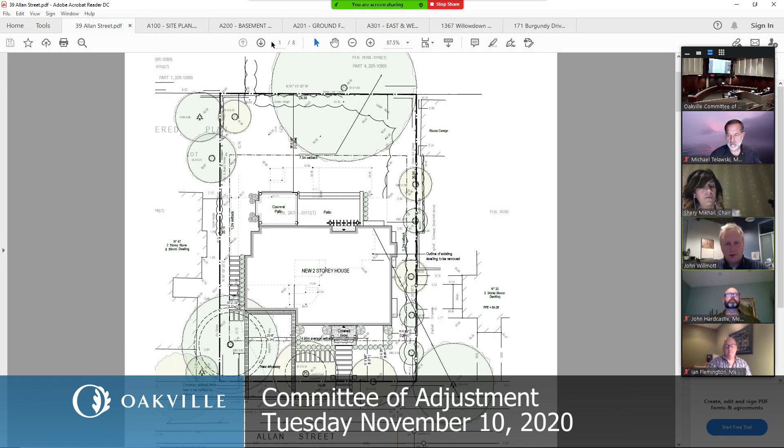Since this application has been supported, I don't need to go through it unless the committee would like me to answer questions. I just want to point out that we designed this in consultation with town staff, planning staff, and heritage planning. The application will go through a heritage review and approval after committee adjustment. We submitted earlier today, after my client canvassed the neighbors, one letter of support at least, and we're not aware of any objections to the proposal. So with that, happy to answer any questions.

Okay, very well. Just because of our new system during COVID, we need to give some time for anyone interested in speaking to the application to call in. So if you want to take a couple of minutes to quickly run through the application while we do that for the benefit of the public, I think that would be best. I know it's a new proposed dwelling, and the variance you're requesting is a lot coverage variance, but I'll leave it in your hands to go through it, and that will give time for the public to respond.

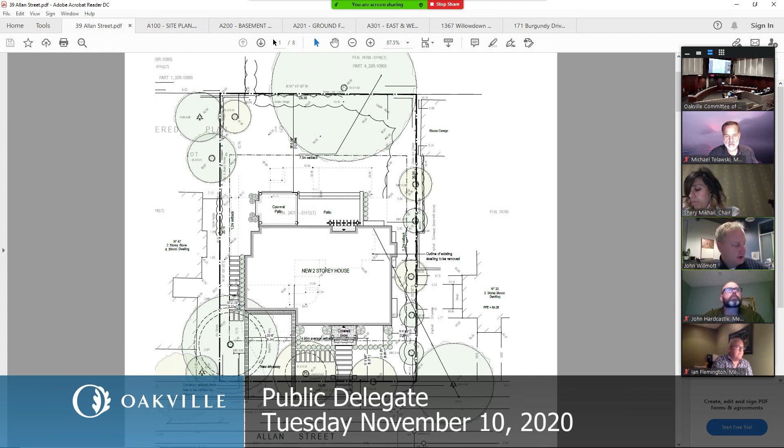Okay, very well, thank you. Ms. McCrae, has anyone called with interest in this application in the meantime? Not at this time. Very well. Okay, so Mr. Willmott, you've seen the recommended conditions by town staff, and I'm assuming you're satisfied with them.

Yes. And if you are, then we're ready to move this into committee and have a motion. Okay, thank you. Go ahead, Mr. Flemington. Thank you, Madam Chair.

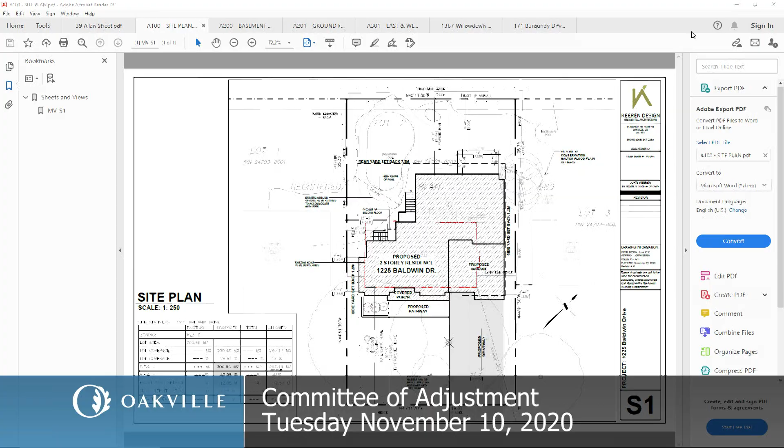I also want to mention that my staff did canvass the immediate neighbors and was able to connect with 3 of them, and to explain the application, there were no objections noted. Just wanted to share that.

Okay, so variance number one, I've just kind of clarified here. This is the area that we're talking about, and we're now within compliance. It's allowed to project 1.5 meters beyond that rear yard setback. So we're just clarifying that. Before, that deck was larger, so that's variance one, no longer required. Go to the next slide now.

Page 2, yeah. So we're jumping ahead here to variance 3, which has to do with the front yard setback reduction. We've just bubbled the area at the front of the house to show that not the entirety of the dwelling is beyond the front yard setback limit. It's just kind of 2 areas. So that's number one. And number two, if you look at the back, sorry, still back to that previous slide, please.

Yeah, so just the other box there, pointing towards the Conservation Halton setback line, I just wanted to explain that that's really the reason why we're being pushed forward, because that setback line is, as you can see, quite far towards the front. So that's really the main driver behind the request for that variance. Next slide.

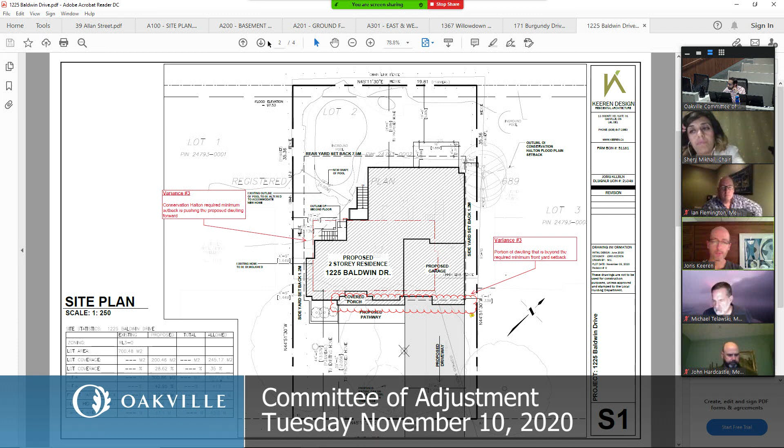So the second variance, which has to do with the RFA overage, I just wanted to let the members know where that's coming from. So on the main floor, we have a servery that was added. That's about 5 square meters, 4.6 square meters.

And then if we can go to the next slide, last one. On the second floor, we basically provided a laundry room, and then an ensuite for one of the bedrooms. So bedroom 2 got its own ensuite. So those three elements add up to the overage, which is about 14.7 square meters in total.

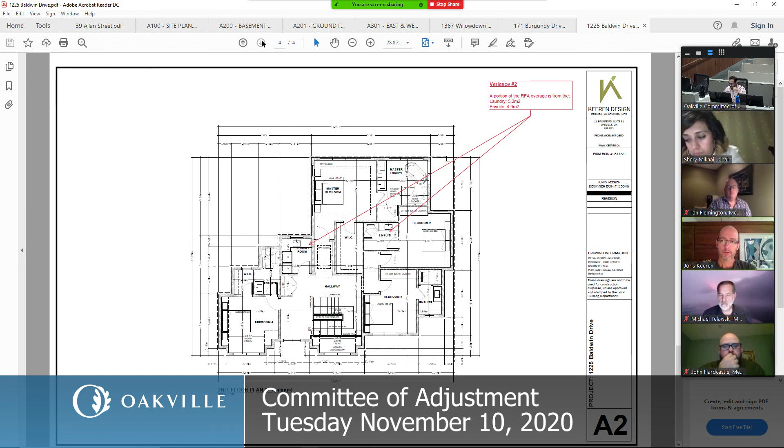So that concludes my presentation. I'll be happy to answer any questions if there are any. Very well, thank you. Are there any questions of Mr. Keeren at this time? I see none.

Ms. McRae, do we have anyone interested in speaking to this application that has called in so far? Not at this time. Okay, so gentlemen, Mr. Keeren, if you're satisfied, then we can move forward with a motion. Sure. Gentlemen, the application before us is amended, so we are now asking for a motion to consider variances only 2 and 3, since 1 has been struck out. Who would like to move a motion? Okay, Mr. Telawski, go ahead, sir.

Madam Chair, I'll be pleased to move the application as revised to remove variance number 1, be approved, finding that it meets the 4 tests of the Planning Act. I would note that there was no objection from the community to this application. I would make that approval conditional on development proceeding in general accordance with the revised drawings as presented to the committee at the meeting. I did not see a date on those drawings, and that a building permit issue within 2 years.

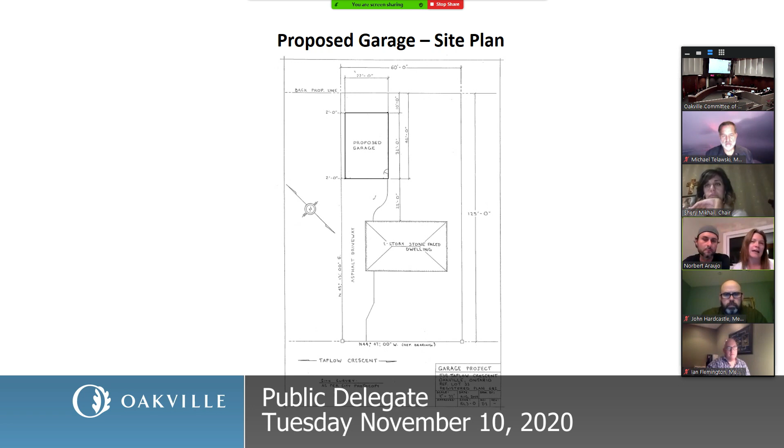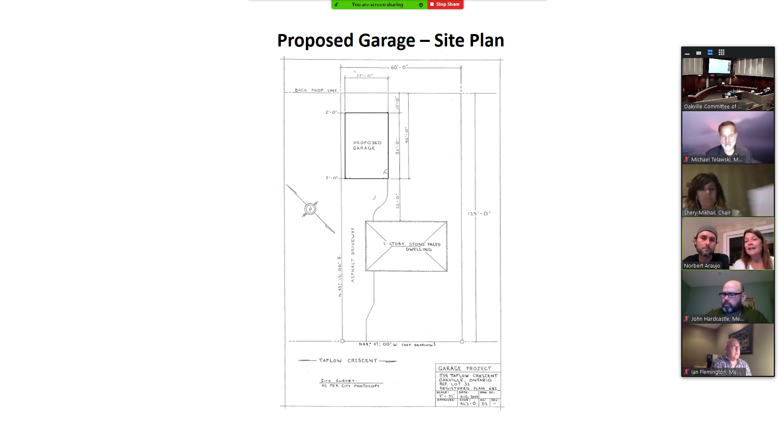Very well, are there any questions? Go ahead, Mr. Hardcastle. Thank you, Madam Chair, could I have the property owner confirm the size of the building? Yeah, I picked that up too, I was scrolling down on my screen to make sure that I heard it right. The size of the garage itself, like the proposed garage? Yes. 65 square meters. Okay, thank you.

That's not what we have, yeah. Perhaps I can direct a question towards staff, because I note that the two variances use two different numbers. In the first variance, the total private garage space is 59.5, whereas for the coverage, it's using 65.4. Perhaps staff can clarify the difference. Through you, Madam Chair, I'm looking through the drawings right now, and I don't see an indication on the floor plans as to the difference in the size. It doesn't appear that there's any separate area in the garage for areas such as storage that wouldn't be for the parking of vehicles as defined for a garage. So unfortunately, I'm not sure what the discrepancy is between the two figures.

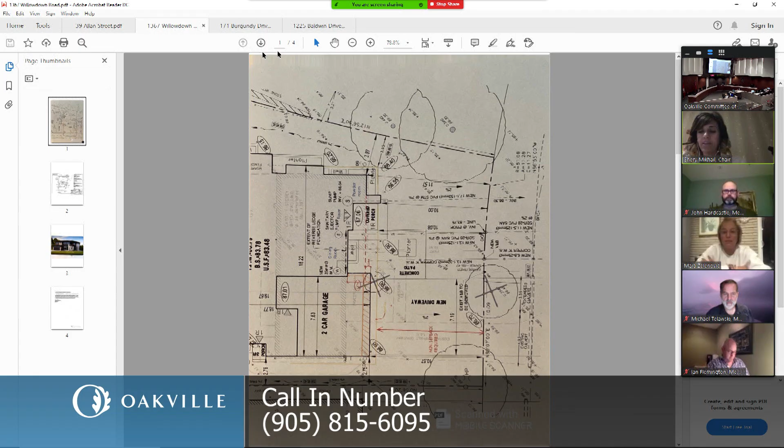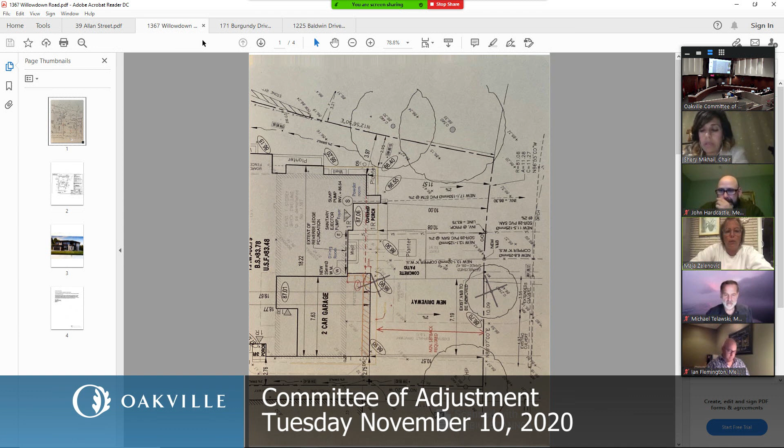I know this is a newly constructed home. Good evening, Madam Chair and the committee members. My name is Maya Zelenovic, and I represent my husband and myself for our home at 1367 Willowdown. We're requesting a garage length variance for our already constructed home under construction home to 2.17 meters from the approved building permit of 1.5 meters. So we're looking for a 0.67 meter exception.

We were previously at the committee for a larger square footage garage and overall RFA back in December of 2019. We were approved at that time, but we weren't aware that the garage didn't meet the requirements needed, and unfortunately through a series of unfortunate events, the garage ended up being built with the wrong survey.

As you can see in slide 1 here, this is where we stand today. We should have been back at the line to the inside of that garage there, where the yellow is marked off. We were always within our minimum setback, and we still are. Where the arrow ends with the minimum setback, that is an overhang of the roof above.

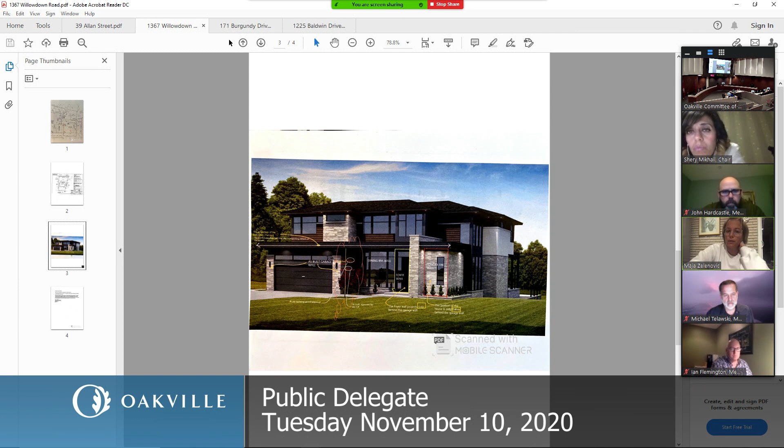If you go to slide number 3, you can see that the whole house is kind of on an even plane, and that represents what it looks like at 2.17 meters. So we're just asking for it to stay as it is there.

If you go to slide 2, you can see there that's the current survey. It's pretty much in line with our neighbor to the north, and we do have a wall that actually protrudes even further than the garage. That's like a parapet wall coming out as an architectural feature. We do understand that we were supported by the town on this, and if you need any further information.

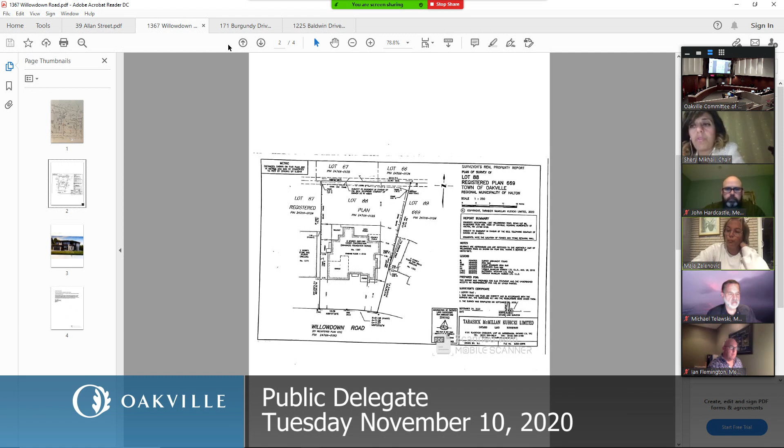Perfect, thank you, Ms. Zelenovich. Are there any questions? Go ahead, Mr. Hardcastle.

Thank you, Madam Chair. I'd just like the homeowner to confirm that the additional projection is actually a roof form and not interior space of the garage. No, it's a flat roof form that just represents an architectural feature. It'll have like an ACM panel on the front, just a feature. Right, but not interior space projection? No. Okay, thank you.

Thank you. Are there any further questions or items of clarification? Okay, I see none. Ms. Zelenovich, if you're satisfied with your presentation, and you're aware of the recommended conditions by town staff, we're ready to take the matter into committee.

Okay, who would like to go ahead, Mr. Telawski? Thank you, Madam Chair. When I was building my own house, I arrived one morning to find my contractor and surveyor having an argument in the hole while they were waiting to pour the foundation as to who had the footing in the right place. So I can appreciate that accidents do happen on grading sites. Having said that, having viewed the dwelling, which is essentially completed on the exterior at this point in time, I don't see that there will be an impact from this variance.

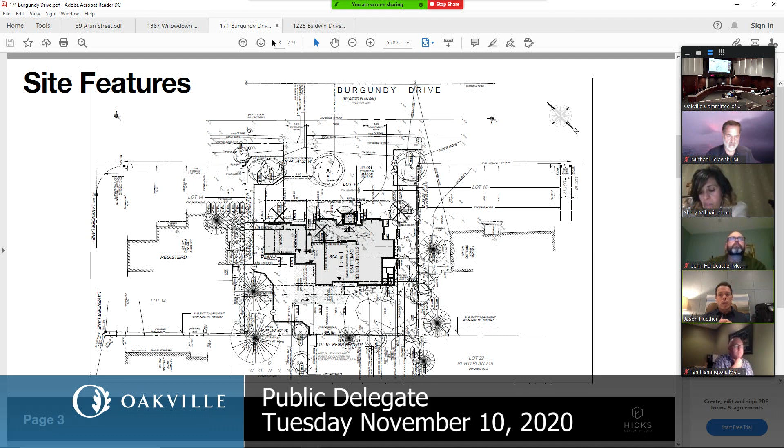I'll just deal with the variances quickly in the order that they were listed. So the rear yard setback, if we can go to page 4. The setback in this case is taken to that covered terrace porch column. The house itself, the main body of the house, meets or exceeds the bylaw requirement of 10.5 meters. The lot is again slightly less deep, so the covered porch, which is unenclosed and single story, projects off the back of the house, thus the requirement for the rear yard setback variance. So again, it's to a covered porch and not actually to the house itself.

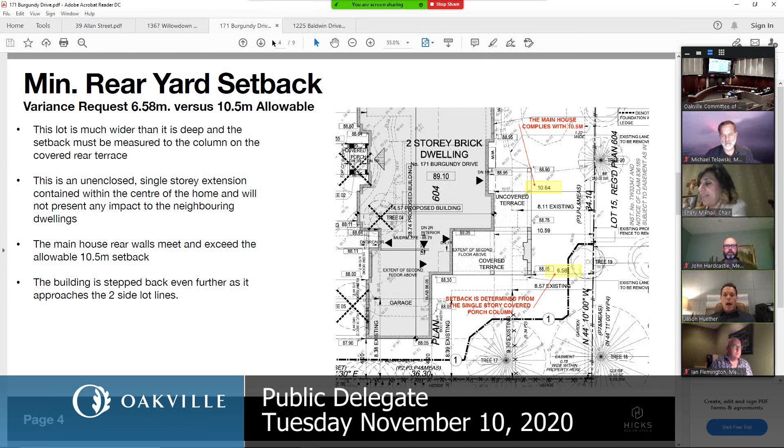The next variance is residential floor area. The variance is really program driven for this home. All steps have been taken to minimize impact of scale for the additional RFA to the neighboring dwellings and the neighborhood itself. The massing of the home has been broken into several distinctive features. The building faces have been stepped along the front facade as well as the roof lines. Particular attention was paid to the area above the garage and how that stepped down to the neighbor to the west. The house features substantial side yard setbacks. We meet front yards, we meet coverage, and it relates well to the current changing neighborhood context. For the most part, in this case, the additional RFA is centrally located in the main mass of the building. We've done all we can to reduce the impacts on the 2 wing walls.

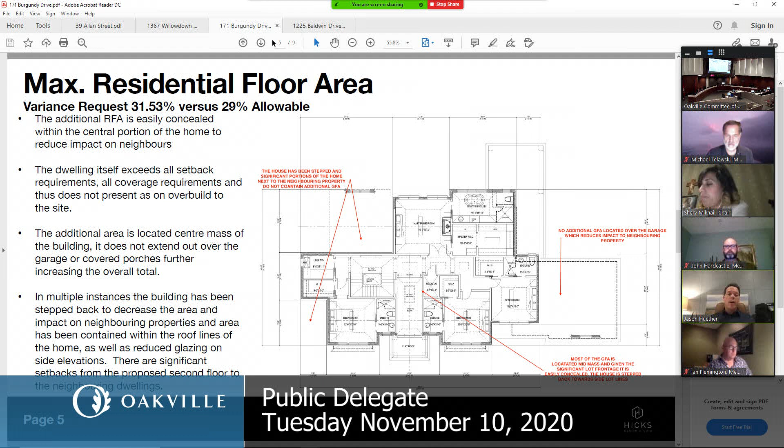Final variance is for building height. Again, if we can go to the next slide - it's really that central portion of the home that is above the 9 meters. The remainder of the house is at 9 meters, or in the case of the garage area, quite a bit below that. The house sits up on a bit of a crest, given that the far west back corner drives the height of this house. It's the high point on this property.

So the discrepancy from finished floor to average grade is approximately 0.85 meters in this case. So that's really what makes up that additional request for height.

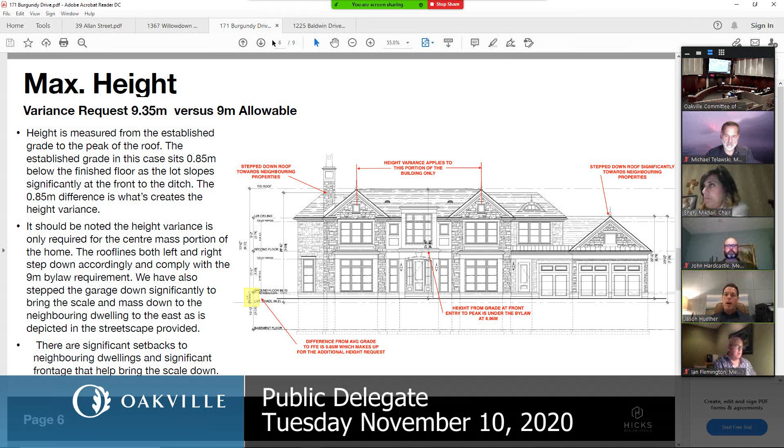Again, we've done our best to break up roof planes. We've done our best to provide relief on the facade of the building. It's been broken into multiple elements that both sort of recede into the home. And again, particular attention was paid to the garage side that steps down even farther to the neighboring side split home.

We've spent lots of time on this house with the planning staff. And the next slide will just show a quick little streetscape that was requested as part of this application.

The house at 181 is to be developed in the very near future, it's my understanding. And you'll see that it steps, all the houses along this street step in accordance with that grade that falls down towards 161 at the far end. So you'll see that we've matched up the height of that garage wing wall with the side split at 161.

More letters of support for this. Planning is onside again. We spent numerous back and forth with them to make sure we put something forward that was appropriate for the neighborhood, and we believe that the variances are minor in nature and meet the 4 tests.

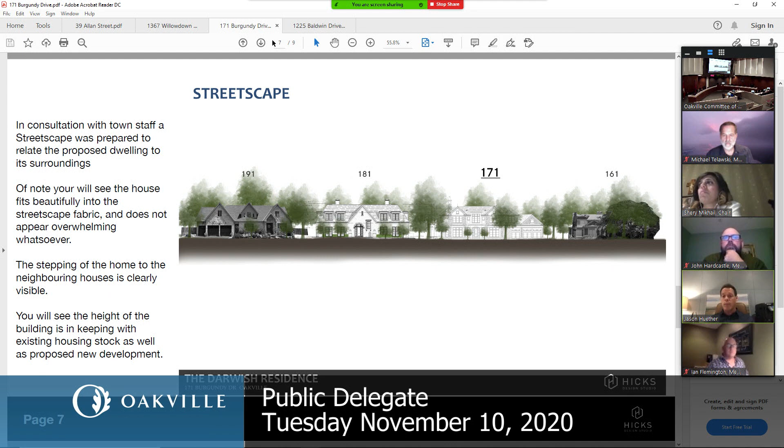Thank you, Madam Chair. Madam Chair, I'm going to apologize if you get a sense of deja vu to the comments I made with respect to the house on Elton Park at the recent meeting. Mr. Huether, I need to get a better explanation from you. You said that all steps were taken to minimize the impact of this house, and I don't see that. The house to the north, which is coming to our next committee meeting, I could see that claim being made in that application that's coming forward.

And as you showed on your streetscape, they've brought in the second floor down to the eave, and they've taken the garage and wrapped it around the side of the house. To me, that represents all steps being taken to minimize the massing of the building. Your application, on the other hand, is largely a full two-story house, and from my site visit, other than the house at the very north end,

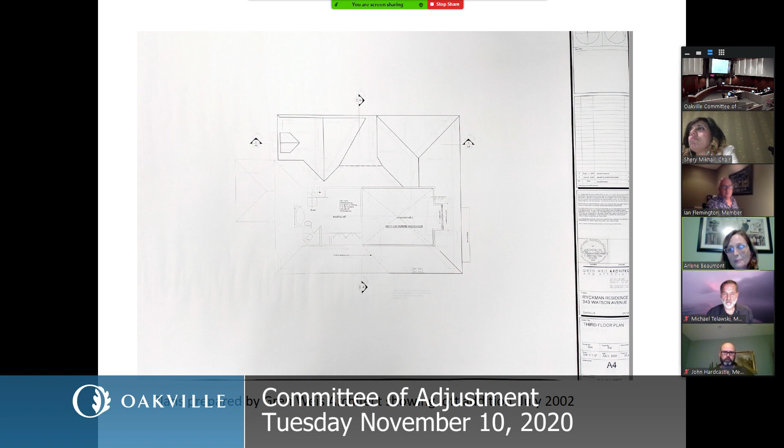Sometime after that, some homeowner actually constructed floor area within the area of this plan that says not for human habitation. So if you go to the next slide, please.

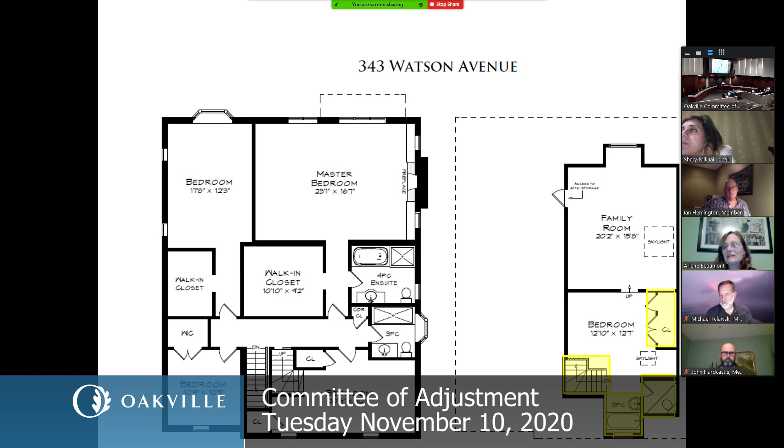You can see on the right-hand side is the floor plan of the loft as it exists today. My clients were given this floor plan as part of the marketing package when they purchased the home back in May of this year. You can see the entire loft area has been finished out. I've highlighted in yellow the areas that my clients want to change under an approved building permit, and that's why we're here today to legalize this additional loft area that was constructed without permits. If you go to the next slide, please.

The next slide shows their intentions. They want to move that staircase from the left front corner of the home into the middle of the loft area, between the legal loft area and the illegal loft area.

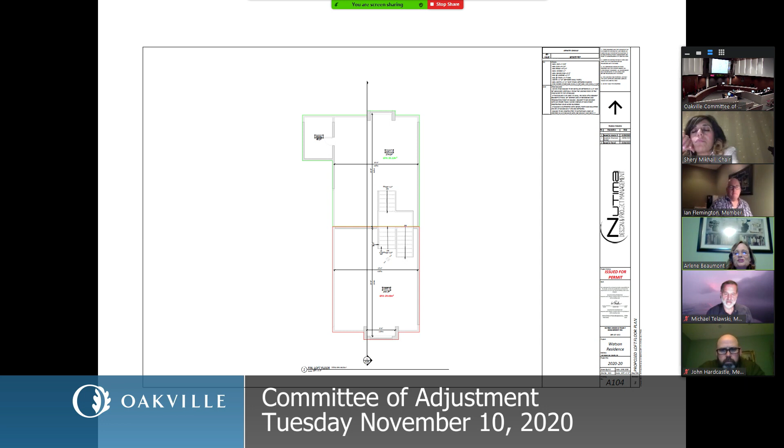So in conclusion, the loft area has existed for about 20 years. Some of it is legal, some of it is illegal. We're looking to legalize additional area that was constructed without permit.

Further, when the original minor variance was approved back in 2002, there was no prohibition against area above the second story. In 2014, the new bylaw was enacted, and there is a prohibition now in the RL zone for floor area above the second story. So even the approved loft area is now considered legal non-conforming, and we require a variance to add to that legal non-conforming space.

So that's the three variances: one is for the legal non-conforming space to extend it, second is for residential floor area, and the third is for lot coverage. I want to stress that this has been existing for a long time. It's at the top of the house. It is not adding to the massing of the home. Unless you knew it was there, you wouldn't know it was there. We do have letters from the neighbors, specifically neighbors on either side and neighbors across the street, as well as a positive planning report. I'm happy to answer any questions.